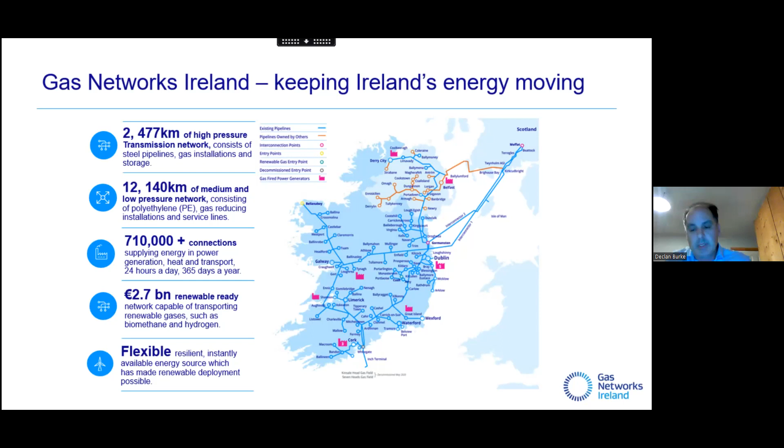We already have biomethane on the network, and a number of CNG, compressed natural gas, forecourts, both private and public. We are working on hydrogen, and we have a hydrogen innovation centre in Dublin, around Brownsbarn. The gas network has demonstrated its resilience down through the years, and it's there to support renewables and the dispatch of renewables.

So, an overview of the project. Here's the map of Ireland. We have two subsea interconnectors coming into Dublin, the area of focus for this evening. The red lines are high pressure pipelines across the country. The subseas are up to 140 bar, and onshore is between 85 and 70 bar, depending on the assets. Zooming in, we have existing gas coming in to Ballough AGI from our subsea pipeline and onshore from Loughshinny.

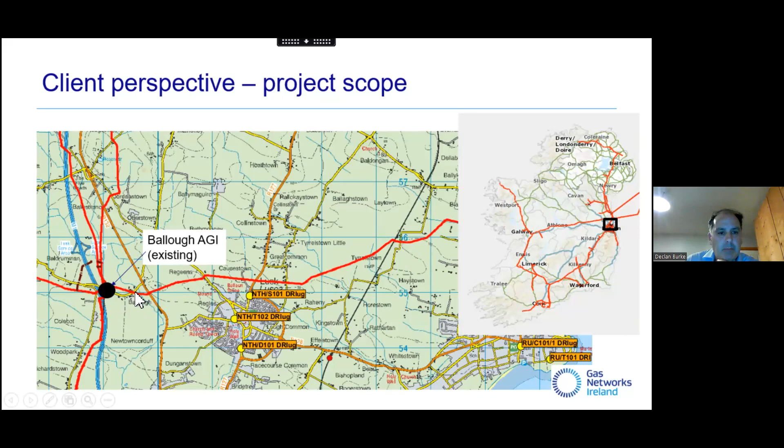The project scope was de-risking a section of the network around Ballough AGI, where a number of pipelines converge, heading west, south and north, with the M1 to the left. In the schematic, interconnector 1 comes in from Scotland, and IC2 here. One is 750, one is 900 millimetre diameter. One can transport up to 60%, the other up to 30, but the flows are interchangeable in terms of splitting flow through the network.

It comes into Ballough AGI, and then it heads south to gas to Cork and Dublin in terms of 750 and 450 pipelines, onwards through a 750 pipeline to Galway, Limerick and around the country, and then heading up towards Drogheda, which we call the Northeast Pipeline, and Cavan, etc.

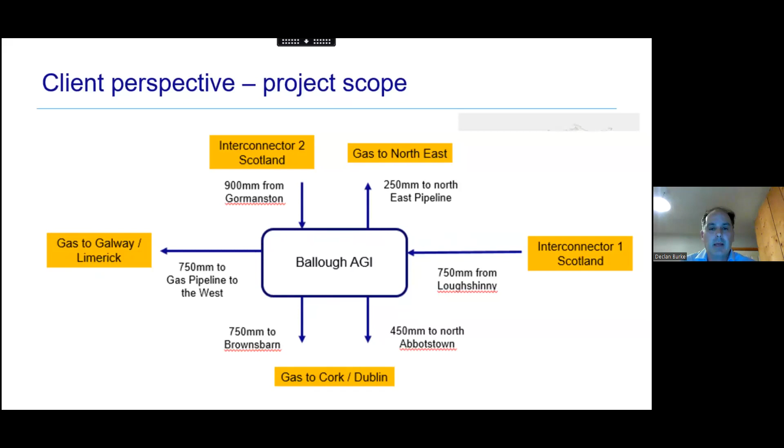So I suppose for ourselves, in terms of de-risking, we have a number of pipelines that are coming centrally, and we were looking to de-risk that part of the network and enhance network flexibility. So part of that involved relocating 3 above ground pig traps, pipeline inspection gauges here, where these are facilitated to launch and receive pipeline inspection gauges for pipelines' internal inspections.

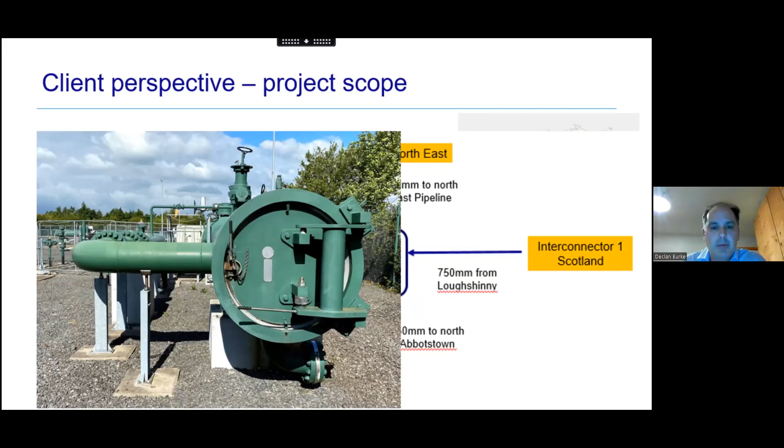So this project was relocating some of that infrastructure so there'd be less assets above ground, and likewise de-risking this part of the network where IC2 would come into a different part of the network called Baldrumman. So look, we'll talk about this in a bit more detail in terms of RPS and the designers.

So the AGI in question, the focus is Baldrumman AGI, just north of Ballough, around 1.5 kilometres. And this pipeline here is actually as built, a bit of 750 pipeline that comes into the AGI, the above ground installation, and it crosses the M1, which our designers and contractors will talk about in a bit more detail.

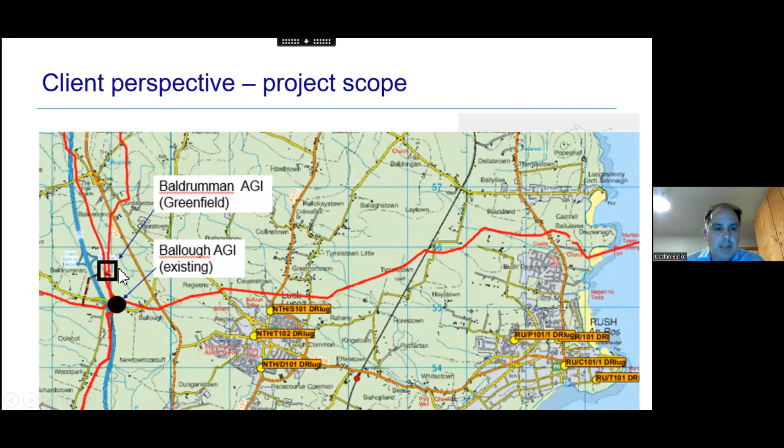And so another schematic on this. This is what we were looking to achieve in terms of the outcome, the project scope. As I said earlier, you have gas coming in here, interconnector 1, and you had the 6 pipelines converging here. By building this Baldrumman AGI, you de-risk Ballough AGI in that IC2 gas now comes in here into the north of Baldrumman AGI and can head west through 750 millimeter pipeline.

And also this project enables future network flexibility in that this pipeline network would operate at 85 bar. So you'd have gas coming in from the interconnectors along where this mouse is here, reduced from 140 or 125 bar to 85 bar into Baldrumman, and then in turn a phase 2 of the project which we're working on, where the gas would be reduced again further from 85 to 70 bar and flow back out here and into Ballough, and then could flow onwards to Cork, Dublin, or around the network.

So this configuration from a transporter perspective, one, it de-risks the existing Ballough installation, but it gives a lot of flexibility as a network operator in terms of manipulating the flows across the network, increasing flexibility, whereas before gas would have come in here to Ballough and just headed south and west. Now it can still come in from IC1, in from IC2 into this new AGI, and the flows can go west to Galway, Limerick, head down and back up the Cork Dublin pipeline. So a lot of flexibility from a transporter perspective.

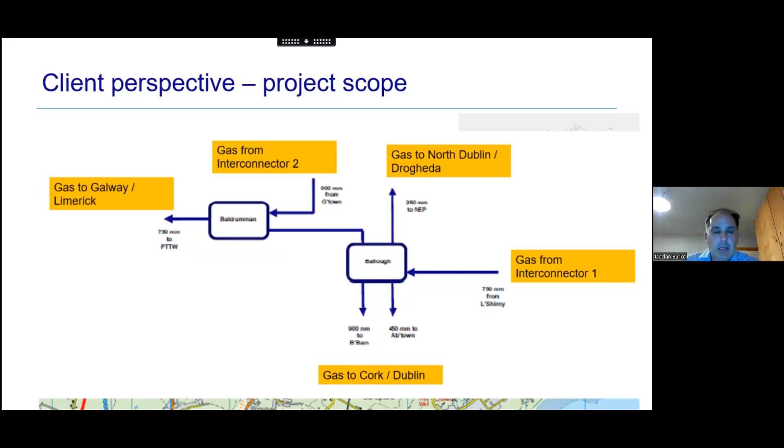So that was a key part of the scope in terms of enabling that piece of infrastructure. In addition, the flexibility and resilience in terms of enhancing network capability. This is Baldrumman AGI, another project that's ongoing here in the southern area reinforcement. So what it means is the network as it stands, all these blue lines here, is the transmission network that I said operates up to 70 bar.

Part of this project, the Baldrumman AGI, will enable the network to be split and GNI to operate a two-tier pressure network. So post-completion, our next phase, we'll be putting in pressure reduction here in Baldrumman to go from 85 to 70, and from 85 to 70 here at Goat Island, and we'll be able to operate this part of the network to 85 bar. Now these pipelines are all designed for 85 bar. It's a newer part of the network.

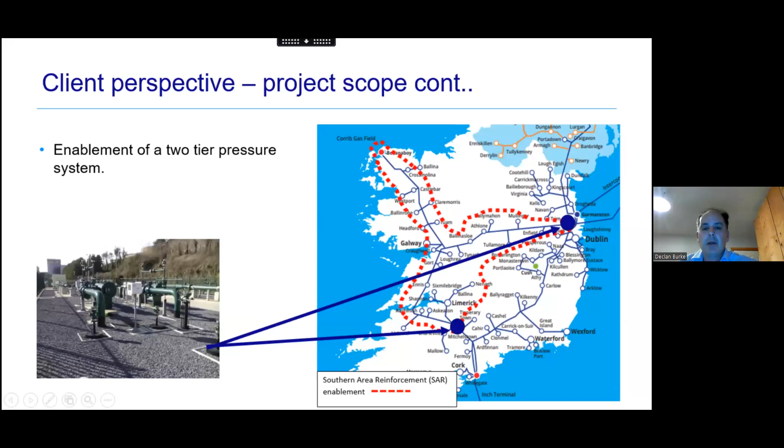This section of pipeline dates back to the 80s, and this was designed with an MOP of 70 bar. So obviously we can't operate that. So we can operate this, but this gives a lot of flexibility in terms of gas entering and exiting the network, in terms of manipulating the flows across the network, either through pressure control or flow control.

So just in terms of, I suppose, the timeline around the project. So look, it kicked off in 2017, mid-2017, and about 4 years for this project. It was commissioned in 2021, November 2021.

A significant project by any degree, a 3-acre site, and Ciarán will talk about that just in terms of site selection. Like in terms of what was required for the site, obviously we needed planning permission. Look, a lot of the activities would have happened during this cycle between 2018 and 2019 to get it ready for construction in 2020, circa June.

So in terms of the type of consents, we would have needed planning permission from Fingal County Council during this timeline. We would need Section 39, as there was just under 800 meters of new pipeline required. So we needed approval from the Commission for Regulation of Utilities. We would have needed our own financial approvals, and approvals from TII in terms of crossing the M1 motorway.

There was a significant amount of material, and I suppose the whole logistics around materials, and materials would have been long lead items, ordered at the prelim design phase back in 2018. In between 2018 and 2019, you're into the detailed design phase. Prelim design can take up to 6 months, then you're into 9 months for detailed design, and GNI were subject to the utilities directive and the whole material procurement.

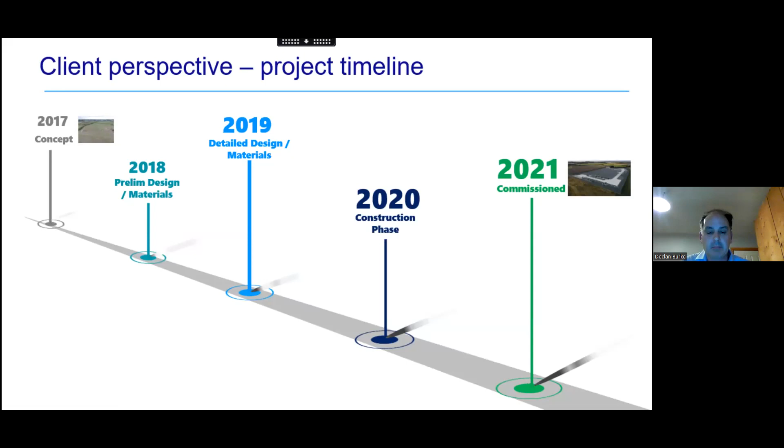But during that whole process, we would have a system in place where we do HAZCONs, site inspections, corrective action procedures, things that might feed back from the field in terms of either designs or design deviations or updating our standard drawings, where we need to take back for future projects that may be ongoing in parallel in terms of other network activities. So just in terms of, from a client perspective, again, around risk management, just to touch on some of these.

So obviously this project, based on the timelines, was during COVID. So again, there were a lot of challenges, and I suppose Ciarán and Kevin in particular can probably speak to that. We had a crisis management team in place meeting every week across things in GNI, not just in particular to this project, but around limiting face-to-face meetings, separate canteens, separate offices, etc.

Gate approvals. We have a 5-stage gate process in Gas Networks, and gate 1 is concept, gate 2 is design and materials procurement, and gate 3 is award of construction contracts. And really that's around financial controls in terms of the monies on the project. So each time you move through the gates, the projects are reviewed. Are things going to plan? How's the estimate doing against controls?

There's monthly runoff in terms of costs, also in terms of approvals. So at gate 2, we'd be looking for monies to order materials, etc. We wouldn't go past gate 3 till we have all our approvals in place, till we have firm dates around materials, till we are in terms of awarding the construction contract, etc. And that's a significant budget then in terms of awarding contracts and gate 3 approvals.

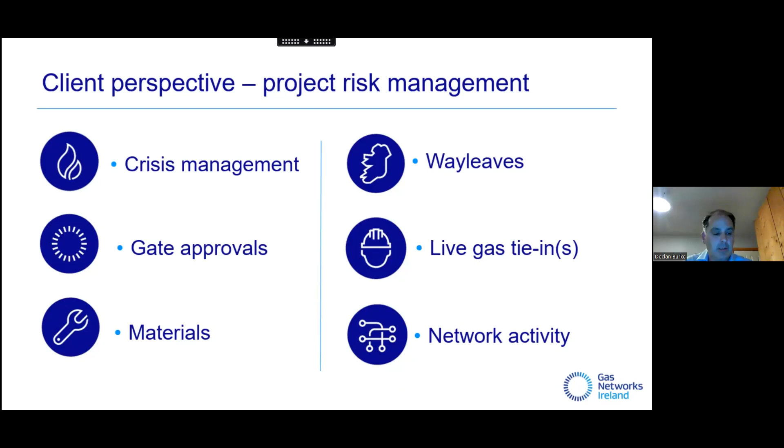So in terms of sustainability, again, a significant project in terms of biodiversity. GNI, we support the All Ireland Pollinator Plan. We conduct a lot of ecology surveys. We've published a number of sustainability reports. For this project here, Baldrumman AGI, it's a 3-acre site. You can see the mouse here, and this coloured map to the right-hand side, this is the outline of it here, and you can see it going around.

So there's 2 phases where we purchased 14 acres. You might say, why did we purchase such a significant land holding? Well, the 2 landowners involved were either side of the motorway, and purchasing land this side would have made it more difficult for the landowner to access, and it would become landlocked. So we enhanced the biodiversity strategy around that site by planting 13,000 trees. Now, we don't have 13,000 trees planted at this moment. It's 2 phases. We were required to acquire a forestry license above 1,300 trees.

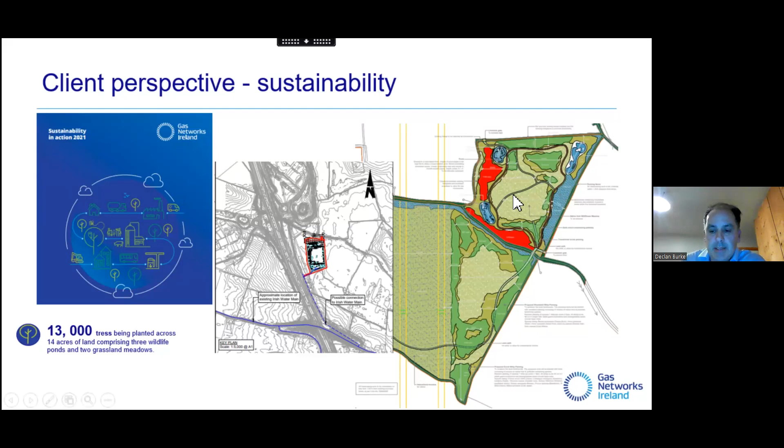We developed a number of ponds and meadows, etc., and walkways across the site, significant in terms of the scale of biodiversity. We're committed to it, and a lot of our projects now feature biodiversity, and it's dealt with during the design process. So just moving on, conscious of time.

So in terms of the stakeholders, there's 25 plus stakeholders, and a lot more involved depending on where you are in the process, through design, through commissioning, through construction. Suppliers in Europe, Germany, in the UK, the whole logistics around managing all the various suppliers and at what point in the process. But internally, we do have stakeholder teams and communications teams. We develop a stakeholder management plan. It's a live document as part of the project plan. It's updated on a regular basis.

We meet with the comms team regularly for these projects and other projects, given the scale of them. And again, the whole communication with the local authorities, letters to residents around the significant works taking place. So the stakeholders and the communications are obviously key to any project like these. And understanding the timelines with other statutory bodies and all connections, be it a connection from ESB Networks or a connection from Irish Water, and how they're all sequenced in terms of the process, the materials delivery, so all things can be ready within reason for the contractor, etc.

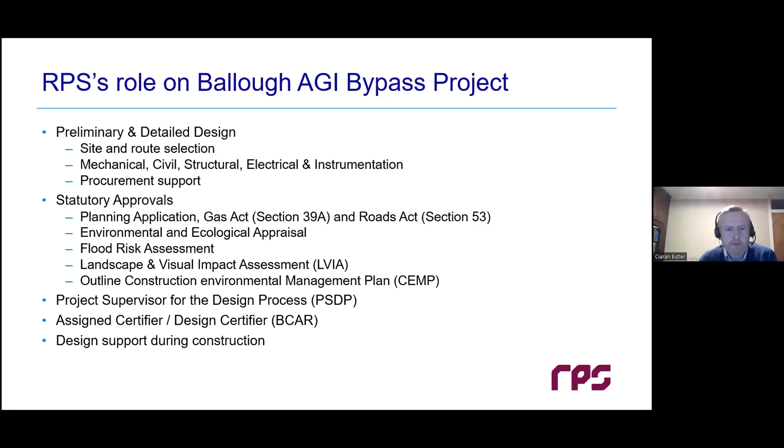In terms of the timeline, Declan's already given a high-level view. It's hard to believe we were appointed to this project back in November 2017, so just 5 years ago. The preliminary design took place from that starting point up to about April 2018. Within that process, we looked at design options and we developed a construction sequence, and I'll talk briefly about those later. We developed the engineering line diagram and a package for review by GNI within their preliminary design process. It's a stage in the design where once the preliminary design is signed off, that's the starting point for detailed design. Our preliminary design was signed off in April 2018, and within that there were a number of items to follow through the detailed design and HAZOP processes that took place later.

In the detailed design, we began using a 3D model, which I'll show briefly as well, which is a helpful part of our design. We developed a detailed layout and a construction sequence document, which was quite detailed and very helpful, which I'll mention later also. The construction tender packages were developed and issued under a fairly tight timeline, as Declan mentioned, to get those out by the end of December 2018. Separately, in parallel, the planning application was being prepared, and it was submitted in February 2019, and ultimately granted in August that year. So we were very pleased with that.

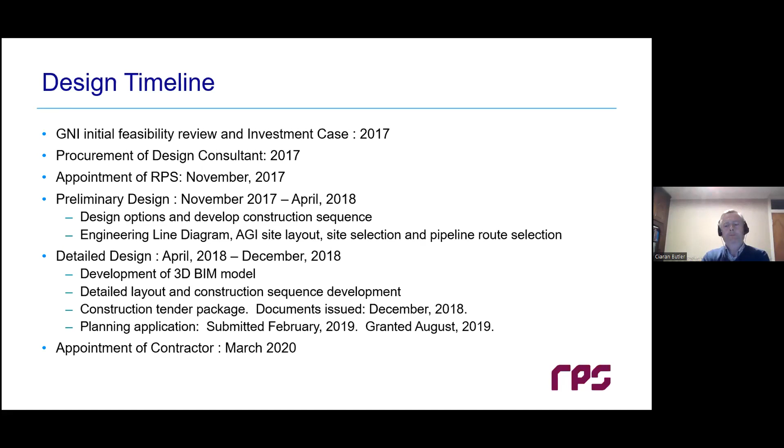That's the timeline. Very briefly, our project, on this very simplistic slide, shows a box roughly 100 meters by 100 meters, which is what we assumed for the siting aspect of this project. Phase 1 was the basic AGI, and within that there's a phase 2 which is the pressure reduction part of this project. It's shown with the arrows here, in between the Gormanston and Ballough AGI part of it. So the pressure reduction would happen between these, whereas, as Declan explained, the 85 bar network would flow right through the station, bypassing Ballough AGI. And that's probably the key point from our perspective on the project: it essentially removed Ballough, or decoupled it from the gas pipeline to the west, with the de-risking aspect of that and the advantages with it.

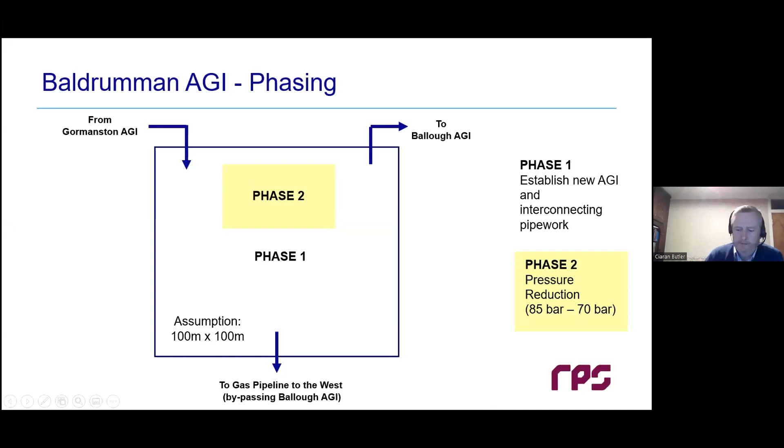And our challenge was to find a location for a brand new AGI to function as we've outlined, to provide that functionality on the network. And among those key constraints I'll talk about in the next few slides were the M1 motorway, the 110 kV lines and the flooding.

So in terms of constraints, I've mentioned some of the technical constraints, but what's very important to mention here as well is the community in the area. One of the key considerations from a community perspective was the potential risk of flooding. That was a very strong point in the area. And also, of course, there are existing businesses in that part of the country.

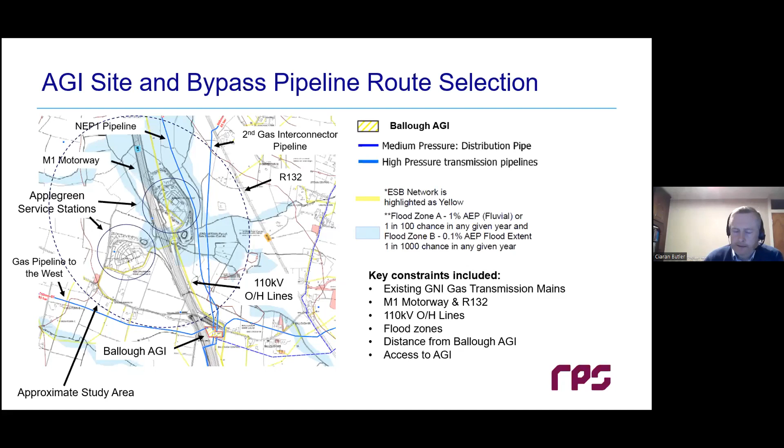Our study area then, in terms of distance, if I go to the next slide, it might be helpful. It just shows our AGI site selection and pipeline route selection process. And we looked at a number of different alternative locations for Baldrumman AGI, we looked at 11 sites. And among the considerations there were having to cross existing pipelines and crossing the M1 motorway.

We could do it in a number of ways. We could either have one 750 millimeter pipeline crossing the motorway, or if you were to take a site on the western side of the M1, we could have maybe two 900 millimeter pipeline crossings under the motorway. In the end, we selected a site which was to the east of the motorway.

It's about 450 meters, I think, from Ballough AGI, and that fitted well within our brief to find a location no further than approximately 1 kilometer from Ballough AGI, and to have it at a reasonable distance to gain that de-risking element of the project. In terms of the 110 kV lines, I'll cover that in a slide. We had early liaison with ESB Networks. We did some flood modeling, which I'll talk about.

And in terms of access, this is a live gas station. There was an important requirement to have 24 hours a day, 7 days a week, 365 days a year access to the AGI, and we were able to achieve that in the site that we chose via an existing local access road, which was built as part of the motorway.

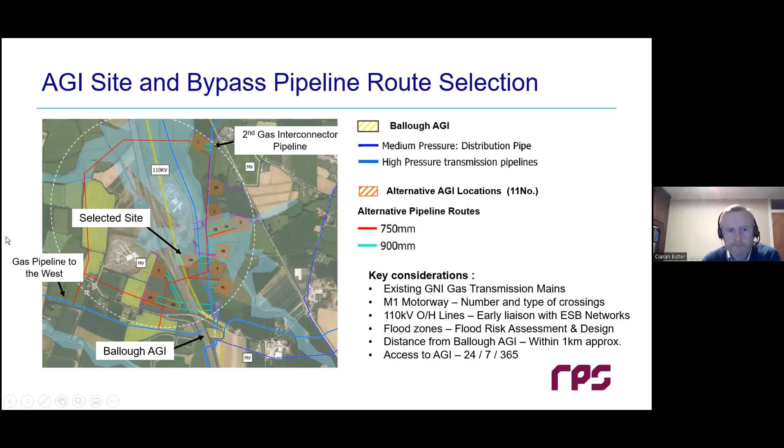So if I move on from here, the ESB lines, you can see them there. That's the Glasmore to Stephenstown 110 kV DC lines. The key to getting that achieved reasonably well, I think, was early engagement with ESB Networks. We went to ESB Networks when we had a good, clear design layout for the project. We shared that with them. We met them on site.

And they were very clear with their requirements in terms of distance and their wayleave. That was all agreed in advance, and as agreed, there was good coordination during the construction stage. So I'm very pleased to say that that aspect of the project, while it was a big constraint, went very well.

In terms of the M1 crossing, that's an image of the M1 close to where the crossing took place. That's from an overpass. The road itself is probably 45 to 50 meters wide at that location, with a crossing length of just over 100 meters. We did a trenchless construction feasibility study for the crossing, and we looked at different technologies from auger bores and pipe jacks to horizontal directional drilling.

Having looked at the SI data for the area, which was available from the M1, and also having some knowledge of the ground conditions from Ballough AGI, some of the concerns we'd have had there were groundwater and cobbles or large boulders, which could be quite a difficult challenge for any trenchless construction.

We carried out new site investigations then, of course, during 2018 to verify or to substantiate what we thought we knew about that crossing, and engage with TII. And TII's requirement, I suppose the key requirement they had for the project, was that the depth of cover would be a minimum of 5.5 meters.

So this part of the works, it was decided that that would be done by specialists within the contractor's brief. And that's how the construction documents were written. But at that stage, we also had a fairly good package of information for the contractor.

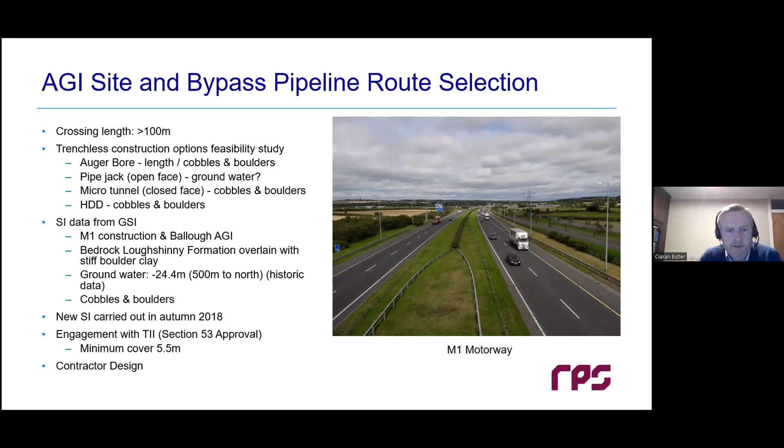If I move on briefly here now, this is just a little bit more detail. It's a development of the earlier slide. You can see the gas lines coming in from Gormanston, leaving via Ballough, and you can see the phase 2 in yellow there. So this layout is essentially what was the basis for our plan that emerged around the August stage of our program in 2019.

The size of the site, we had envisaged 100 meters by 100 meters. In the end, the actual design was about 80 meters by 120 meters. And Declan has mentioned the size in terms of acres. I think a useful benchmark is probably to compare it with the football pitch in Croke Park, which is slightly bigger at 145 by 88 meters. So this is an important point to make in terms of its size. The 120 meters means it's quite a long site.

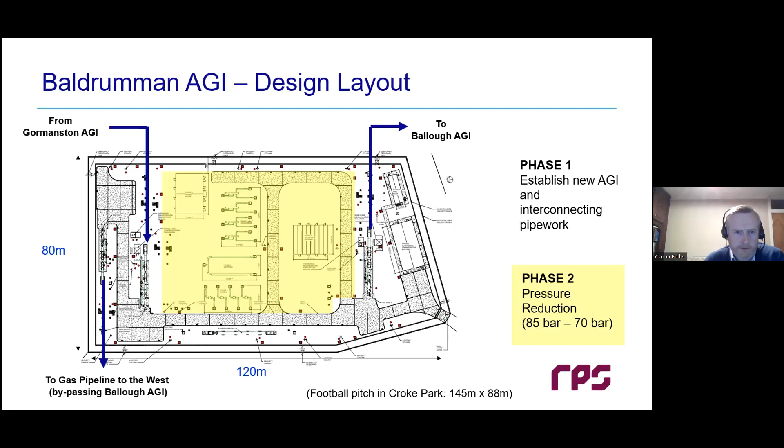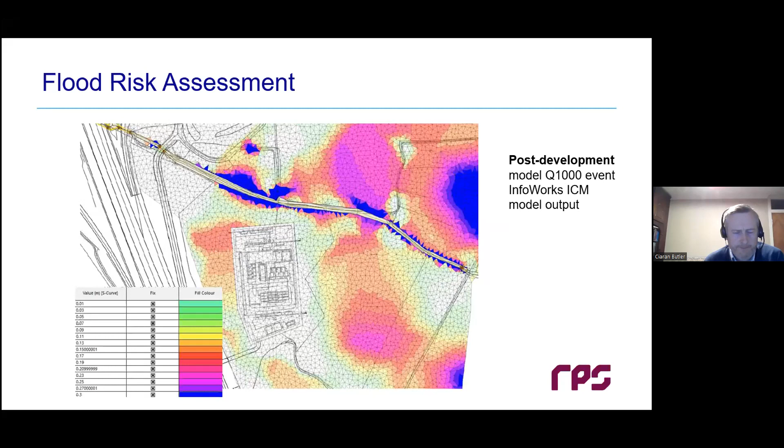So what I'm trying to say here is that after modelling it, we could conclude that there was very little, if not insignificant, impact on local flooding in the area, and we were able to show that for the 1 in 1,000 year event through modelling. An output of that, hopefully you can read some of this, was that we concluded that development won't contribute to an increase in the flood risk in the surrounding areas, which was an important consideration for the local community.

We would limit the surface runoff to 2 litres per second per hectare, and part of that is achieved by the attenuation pond there to the north of the site, which we needed to build into the design. The minimum ground levels for some of the key buildings on the site were raised in order to allow for potential flooding and extreme events.

And then a key aspect of it as well is that the contractor would take measures during construction to ensure that flooding would be managed on site. And I think you might see some of the photographs that Kevin has to show how that was done, and it was done actually very effectively.

In terms of the design challenges, I mentioned the length of the site, and the site needed to be drained. It was drained to one end. Being a long site, we needed to be mindful of the falls and gradients within the drainage network. We had the gas pipeline infrastructure within the site, to ensure that didn't conflict. We needed to have some cut and fill on the site.

And in some cases, that meant that the AGI pipework was quite deep relative to what it would normally be. For gas pipelines in Ireland coming in and out of this site, for example, the minimum cover would typically be 1.2 meters. So in the case of this AGI, some of the pipes were relatively deep because some of the site needed to be raised. And we were able to model that within our 3D model, which was very helpful.

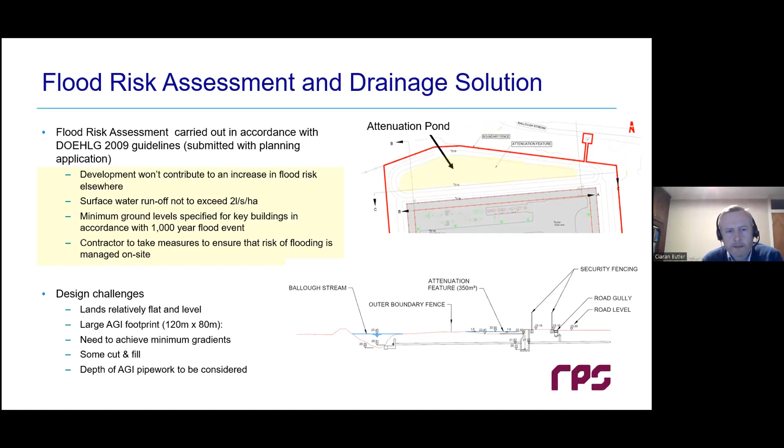We produced a series of over 20 drawings to go through each step of the process, including the 9 hot taps that were involved, and we included with that a step-by-step narrative of how each and every valve would have to be opened or closed, as the case may be, and every sequence of the work to make it as clear as possible. That was then reviewed with GNI.

We had a very good review process for that, an operations and constructability review meeting, and after that there were several optimizations of it as well. That's the document then that was issued for construction. And during the construction stage, there was even further optimization with input from, I would say, GNI operations and from Murphy's, the contractor. So there was really good collaboration in that sense.

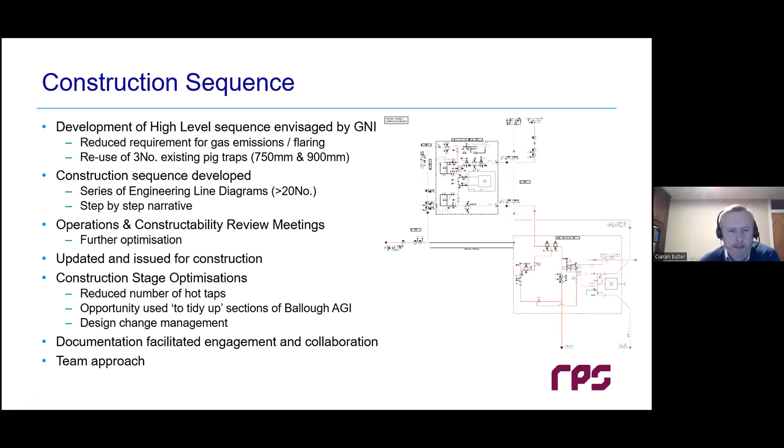And each of those changes, once the design had been there, I suppose it's important to say that design change management took place to record each part of it and to make sure that anything that we changed had followed through the requisite review process. So we think it was a good example of developing the process together, and I think that team approach worked very well.

And within that, one thing that I think is important in terms of managing data and the project is that in developing that model, we used standard sizes for various AGI elements, and those elements might be a valve, they might be a T or a bend or whatever. And in making those and putting them into our model, I suppose we learned as we went, but it's important to pass it on, is that as the projects go through the procurement stage, first of all, we have to be very clear about what standard dimensions, ASME or API or other standards, they may be different.

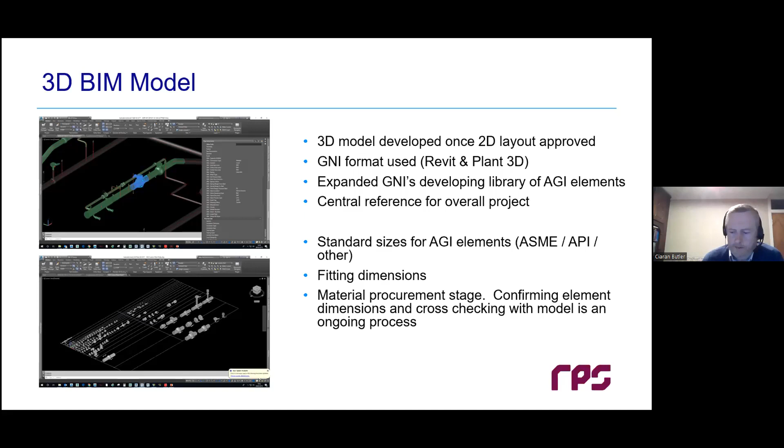So that was the upfront design work, and I think it's an example of how doing that bit of design work up front helps to minimize problems at the construction stage. The 3D model then will be updated for the safety file, so that's going to be a reliable source of information for GNI for the next phase of the project, phase 2, as we say.

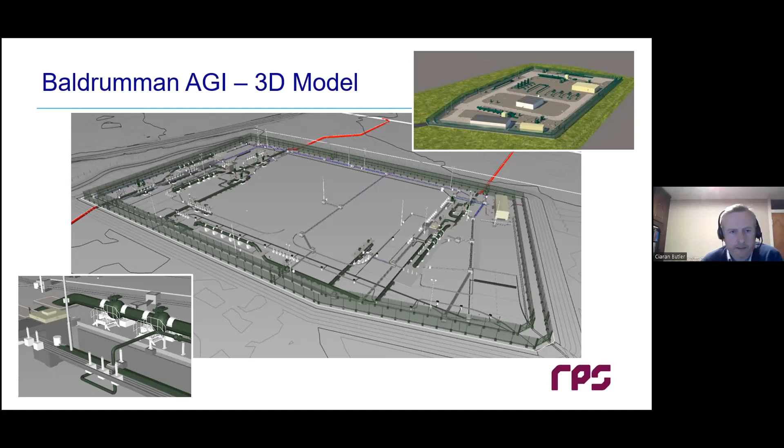An example maybe of how we use that 3D technology was in Ballough AGI, where we were making other tie-ins as part of the overall project. And when the areas were exposed to begin tying in, making those hot taps, an existing bend was discovered which wasn't recorded in as-built drawings. Now, this is something which needed to be discovered at that stage. It's not something that you would do, to dig up an AGI in advance to find something you don't know is there, if you like.

So when it was found, it was very useful to have the 3D model to go and use to find a solution. So what you see there is an image of, we did LiDAR surveys of the tie-in points.

We had the various elements of the AGI, which we could then move around on the site, and we needed to do that. And we were able to show that there was a design configuration that could be used on site reliably, which was then proven on the ground with Murphy's. They were able to do that. And I think what's important as well is we were able to capture all of that within that design change process that GNI operates, and document all that clearly for everybody's benefit.

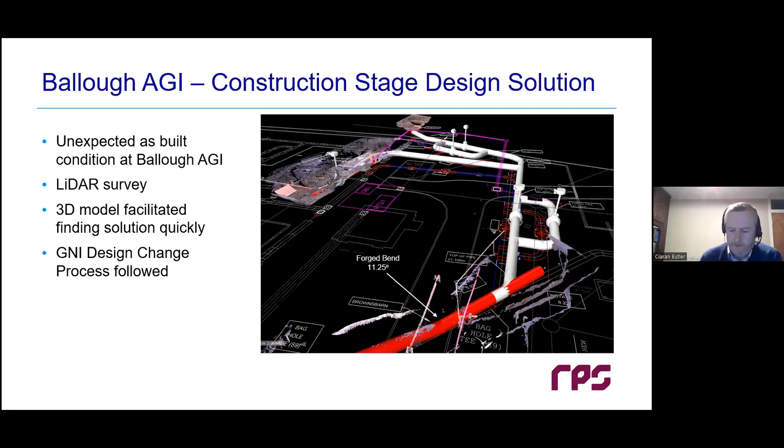In terms of the 3D model, very quickly, we can use that in different ways, and I suppose a key part of it would be to take those mechanical and civil layouts in the detailed design and be able to generate welding isometrics and material takeoffs. And these are the sort of things that you can do very effectively with a 3D model once it's there.

But as I was mentioning earlier, it's really critical that the information going into that model is reliable and monitored, depending if there's any change, to make sure that your model itself then is a reliable central reference point.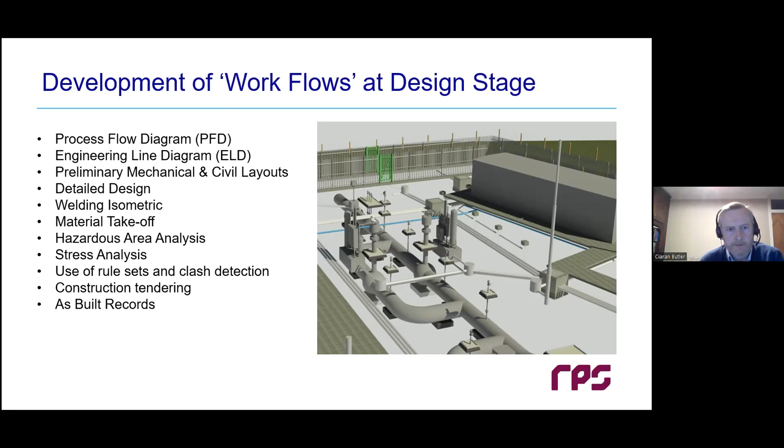And then I'll finish on sustainability. It's a key part of what we do. As an organization, we look at projects these days now, and we have a process where we try and document what can we do on this project for our clients that's sustainable, and to add to the project in that way.

And this project, we did have a look at that at the very start, and examples of what we did on the project included, I suppose you could say, the construction sequence is one. Minimized the amount of venting. There were 3 large pig traps that were refurbished and reused. It's fairly important, a big thing. It's something that GNI was keen to do as well.

We limited that surface water runoff. And then the landscaping and biodiversity measures were something that we had hit on at a very early stage, and very pleased to see that that's really been taken up by GNI, and it's something that I think is going to be a really nice feature of the site. LED lighting, simple things like that, and construction stage.

Even at the start of construction, we were able to accommodate nesting birds, and that was something that I think was very effective. Construction happened. We had ecologists on the site. We were able to have construction continue, and certain areas were not cleared to facilitate that, which I think was a very good success story. And I think Kevin will talk briefly about some of the water management and bulk fill materials savings that were made on the site also.

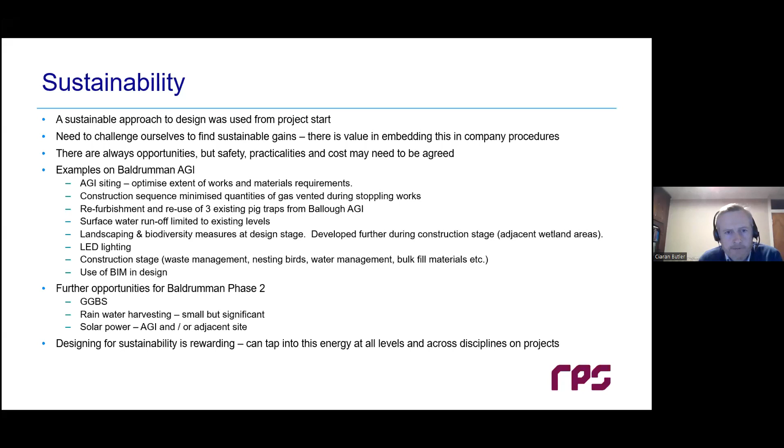The global revenues are 1.9 billion, with Ireland contributing 217 million of that. We've had 20% growth sustained each year for the last 5 years. In Ireland, we've offices in Newbridge, City West, and Naas Road in Dublin, and Antrim and Newry in Northern Ireland. The Murphy Group employs over 5,000 people, with 600 of those in Ireland.

We've 120 million worth of our own plant and equipment, and we invest fairly heavily in that each year to upgrade and expand the fleet. We operate a 7-sector strategy in Ireland. We work in civils, natural resources, power, water, wastewater, structural steel, piling, and operate and maintain.

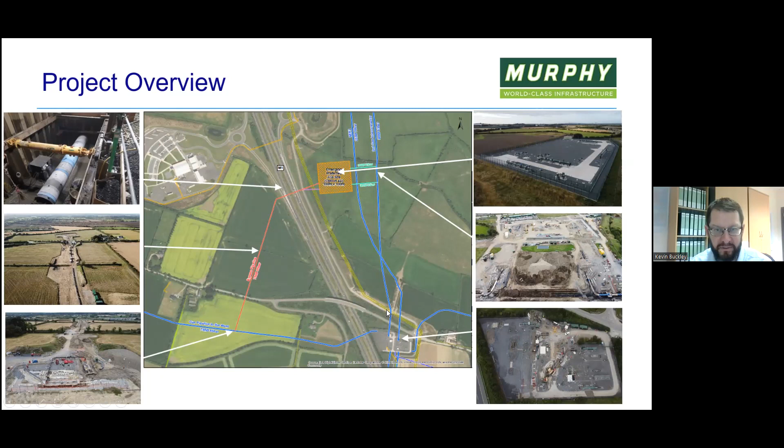We clocked up over 163,000 man hours on the project with a peak of 90 people. There was no lost time incidents or no environmental incidents in the job. There was 414 separate people inducted, which gives an idea of the scale of the challenge. The site is very visible from the motorway, and it was one of the only sites in operation because of the lockdown, so it got an increased attention from the HSA. They visited site twice. Both visits were very positive.

Our cultural development program was attended by everyone on site. This is a workshop that focuses on our safety behaviour. Attendees get a deep dive into the Murphy values. Every January, Murphy holds back to work briefings on all our projects. We call that our safe start. The purpose is to refocus everyone following the Christmas break and review and reflect on the previous year's health and safety performance. The one summer and one winter campaigns are held to remind personnel of the seasonal risks associated with

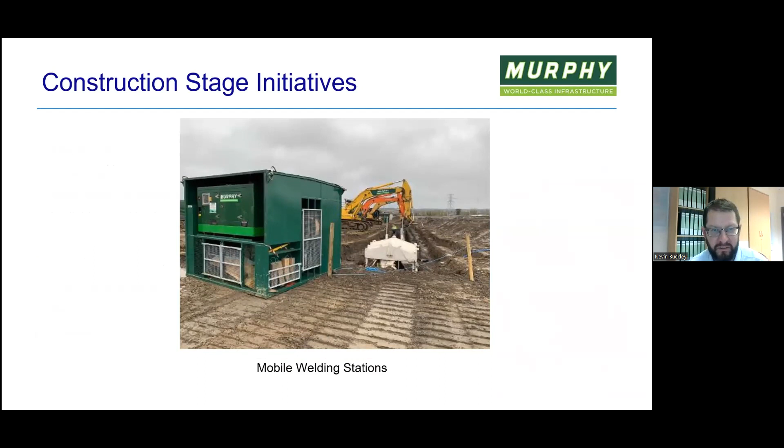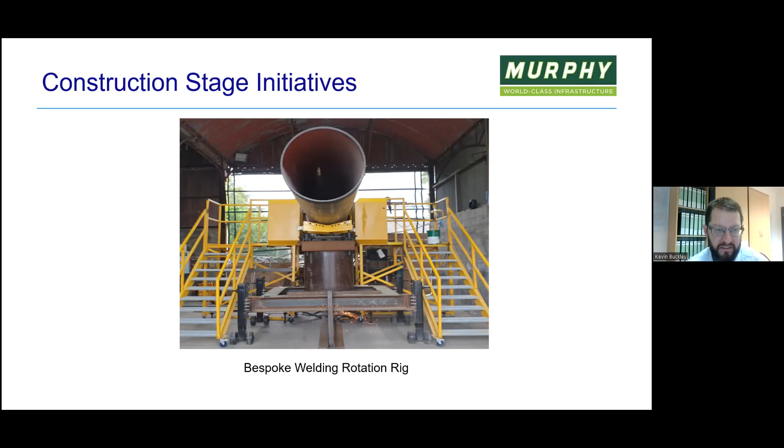The assembly that you can see in the middle here was able to roll out of the fab shop out into our yard. And this was a significant safety benefit because it allowed us to load up the fabrication using a crawler crane out in the yard rather than inside in the fab shop using the forklift. It's always safer to handle stuff using cranes.

The last one is coating canopies. In the original program we would have carried out site coating in spring and summer. The coating that was required is a multi-component liquid, and it's very susceptible to moisture in the air. It's extremely difficult to apply in winter months.

Because of the resequenced program, the coating works were forced into more unseasonable months, and to overcome this, we fabricated large insulated canopies. This enabled us to carry on with coating activities using dehumidifiers and heating equipment to get the correct temperatures.

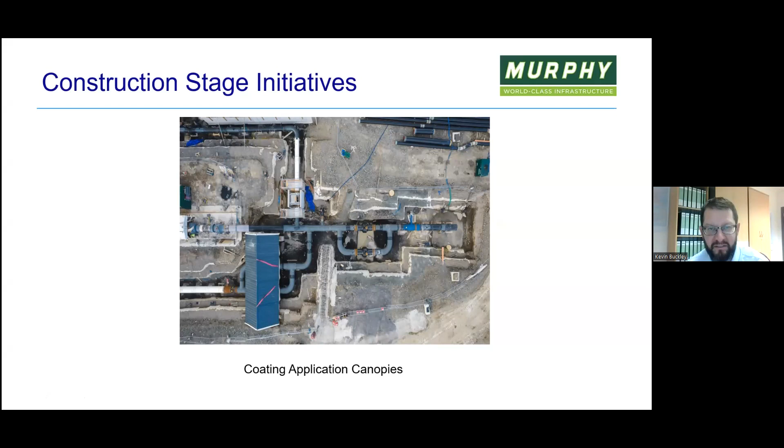It's the hot tap procedure. So we're tying into the live pipelines. All our welders for this were specifically qualified for welding live pipelines on this project. That training was carried out in Newbridge, and it went on for a number of months before we started. So the first job is to expose the live pipeline. That's the gas to the west pipeline we can see in the photograph there.

Once that's uncovered, the next task was to remove coating to test the tie-in locations. The tests included radiography, magnetic particle inspection, dimensional checks, and metal sampling. Then the concrete bases were poured, and the canopy that you can see in the picture was put up just before welding to make sure that conditions were perfect for welding.

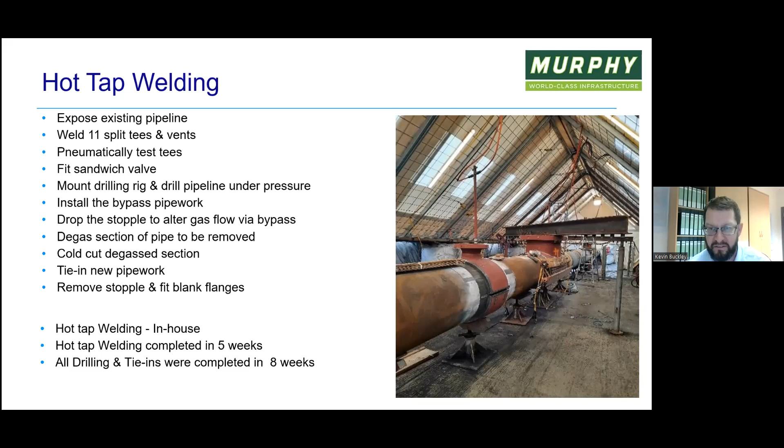Once the tees were welded on, they were pneumatically tested, and the sandwich valve fitted onto the top. So each tee that you see in the picture there would have taken 3 days welding. You'd have had 2 shifts of 4 welders to do them for 3 days.

Once the welding was complete, the next task was to drill into the live pipeline. So the drilling rig was attached onto the sandwich valve. It's here in the photograph. That's a fully enclosed drill that can take the line pressure of the gas.

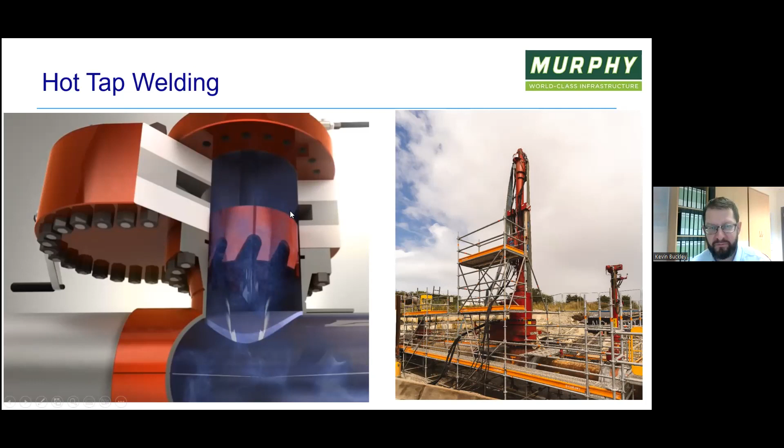The sandwich valve that we can see in the 3D rendering here would have been opened, and then the drilling cutting head could come down and it would cut this coupon out of the pipe. Once it was drilled, it lifted the coupon back up above the sandwich valve, and the sandwich valve would be shut, and the drill could be taken off.

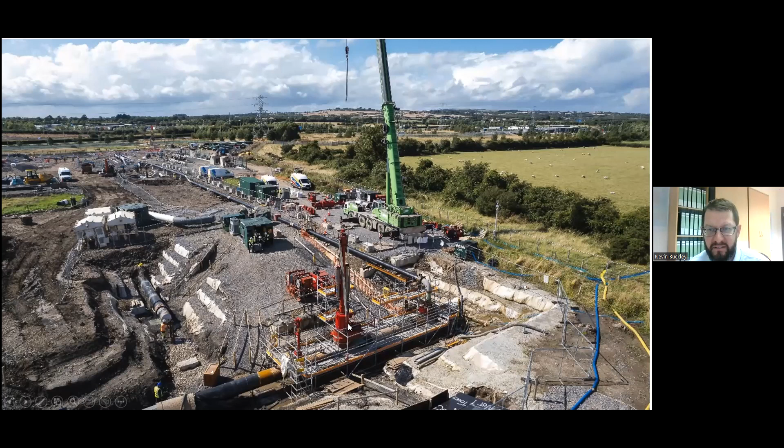The next operation is to fit on the bypass pipework. This is on the interconnector 2 pipeline. That 18-inch gas pipework was fitted on here. Once that was installed, it was commissioned, and now gas could flow from the interconnector pipeline through half of the new Baldrumman AGI and through the new bypass pipeline onto the gas to the west pipeline.

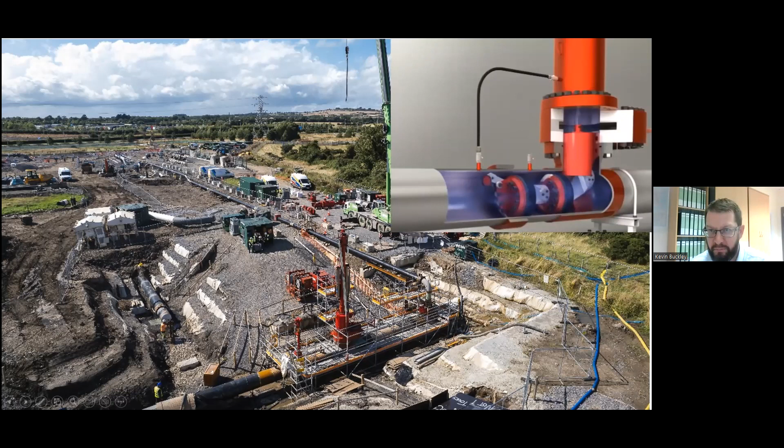Once that was all commissioned, we could then stop flow in the interconnector pipeline heading for Ballough AGI. That operation was done using a stopper. It's a 3D rendering of a stopper there. The sandwich valve was open and a plug inserted into the pipeline. Once the plug was inserted, that would stop flow coming down along the pipeline here, and the rest of the pipeline could be degassed using vents.

That allowed us to do a cold cut to cut out a section of the live pipeline, and we could tie in this section of pipeline into the existing interconnector pipeline. Once all that was done, the bypass was decommissioned and taken off, blanks fitted to all the T's, and the area backfilled.

This is the M1 motorway crossing. This was carried out using a tunnel boring machine. Following careful consideration of the site investigation and groundwater, we decided to use an open face TBM. That was down to risk of boulders, as Ciarán said earlier on. Pre and post construction surveys were carried out on the M1 to make sure there was no settlement. We were liaising closely with TII through the whole operation.

There were sheet pile pits installed to the north and south of the motorway. And on the southern side for the reception shaft, we installed 4 dewatering wells. That was due to the presence of an artesian aquifer. So we just wanted to relieve groundwater pressure before we started tunneling. The entire tunnel length was 150 meters, and it was 10 days tunneling, 24 hours a day. We decided to go 24 hours a day just to mitigate any risk of settlement on the motorway.

Once the tunneling was complete, GRP sliding supports were fitted into the base of the tunnel, and the gas pipe was jacked into position. Each weld was coated with a specialist coating, polypropylene flame applied coating. And once the gas pipe was installed, it was independently tested up to 140 bar before we grouted it in place.

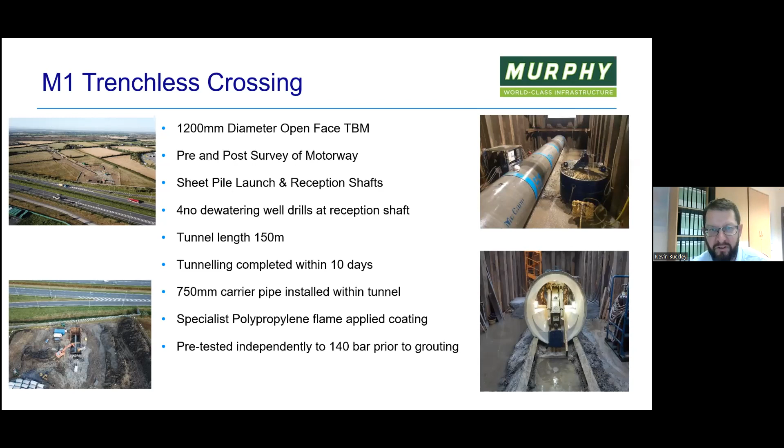Some of the environmental initiatives on the site. We worked closely with GNI and RPS to make sure that there was no excavated material taken off site. It was all used around the new AGI. Before the project, we invested in eco-friendly welfare accommodation, hybrid excavators, and electric telehandlers specifically for the project. Murphy's are committed to invest 75 million by 2026 in environmentally conscious plant.

The new pipelines were hydrostatically tested to 128 bar. This needed 600,000 litres of clean water. Normally you get that water from potable water pipelines, but with an agreement from GNI on this project, we decided to use water from the dewatering wells in the tunnel following lab tests. This negated the need to import water using road tankers and decreased carbon emissions by 6.7 tonnes.

We also reused approximately 5,000 tonnes of stone that was used to provide access haul roads to the pipeline areas in winter months. The stone was removed, regraded and used to raise parts of the site in the Baldrumman AGI, and avoided 250 truck movements.

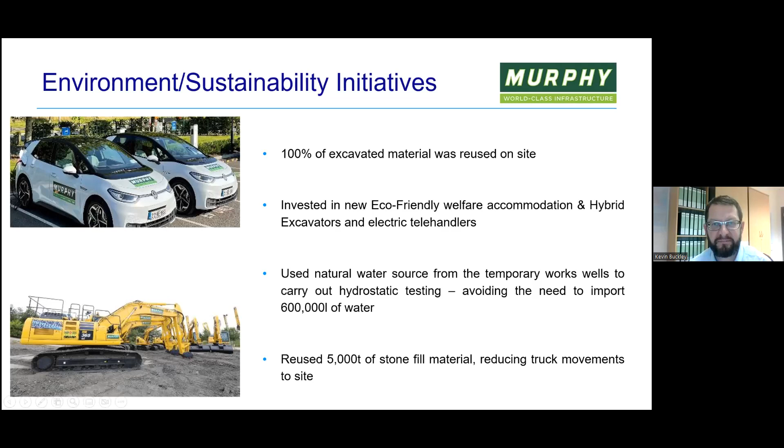This is part of the biodiversity scheme that Declan and Ciarán both mentioned earlier. So the Ballough AGI bypass is part of an ambitious biodiversity scheme by GNI. GNI acquired 14 acres, as we can see here in the photograph, of land adjacent to the AGI, and in partnership with Murphy's, developed a biodiversity area. The biodiversity area includes 3 ponds, 2 grassland meadows, and over 13,000 native Irish trees.

The primary goal is to offset carbon emissions of the facility over its lifetime and enhance biodiversity in the local community. It's great to see a client that is actually willing to spend money on biodiversity rather than just talk about it. The planting will be finished over the next few weeks, and I think it'll really cap off a great project.